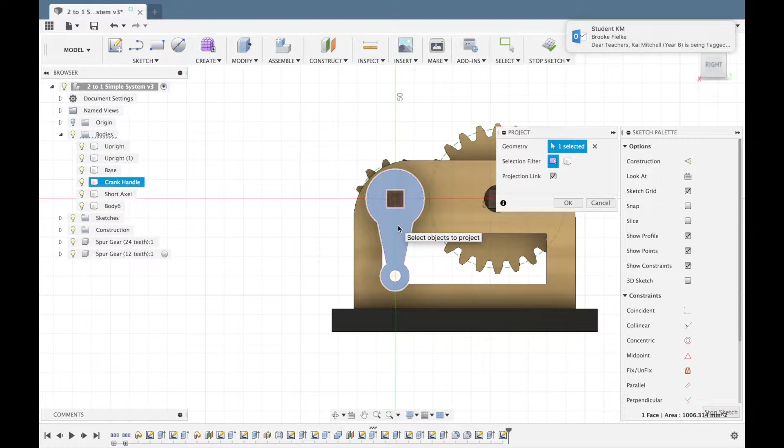It'll then take me in there. I'm going to press P for project. I'm going to click somewhere in the middle there so that all lines are basically lit up, and then I'm going to press OK. You'll now see that I've got purple outlines around all edges that I need to cut on the laser cutter. I'm going to now hit stop sketch.

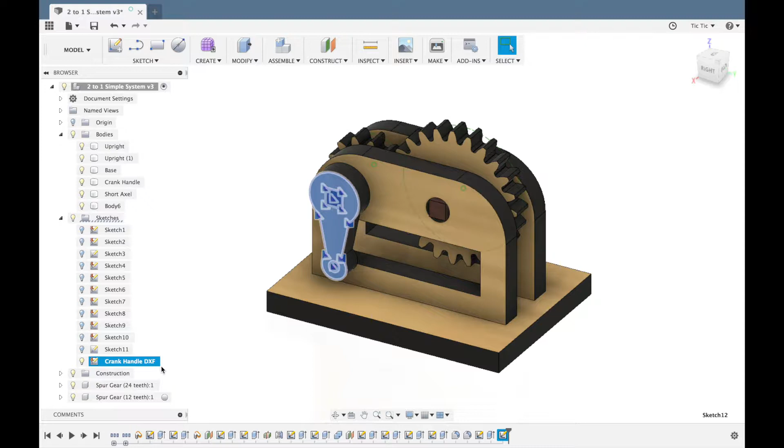That sketch is now visible, and I'm going to go into my sketches, and this one's the visible one here, and I'm going to call it crank handle DXF. I didn't accept that change. Crank handle DXF, enter. There we go, it's accepted that change. I'm now going to turn that sketch off, and I'm also going to turn the crank handle off.

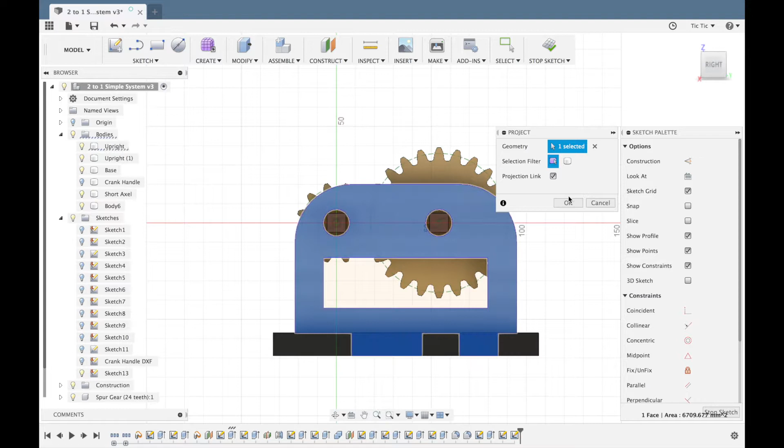I'm now going to repeat the process again, and I'll do it one more time for your benefit. I'm going to click on create sketch. This time I'm going to click on this particular one here. I'm going to press P for project, and I'm going to choose that particular one and press OK. I'm then going to hit stop sketch, and you'll see now I've got a new sketch down here, and this is going to be called upright. Press enter, and now it's called upright.

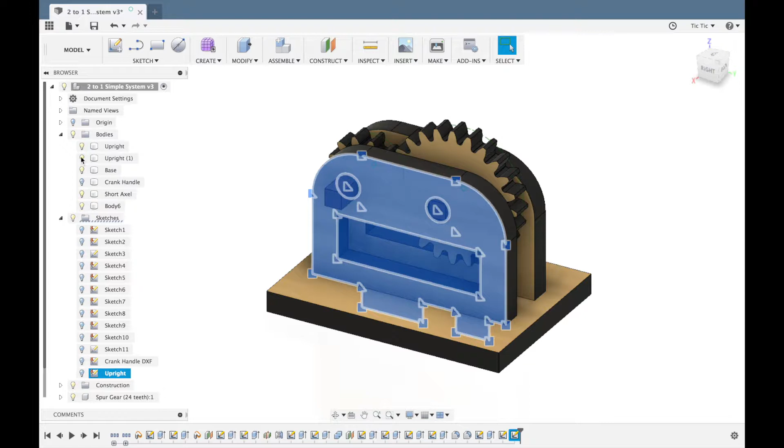Now I don't need to do the second upright because they're both exactly the same. So I can now turn off that upright and turn off this upright and this upright. And now I just need to work through the final things. I don't need to do the axles, so I should turn those off as well. So I do need to do 3 more things, and I'll do those now.

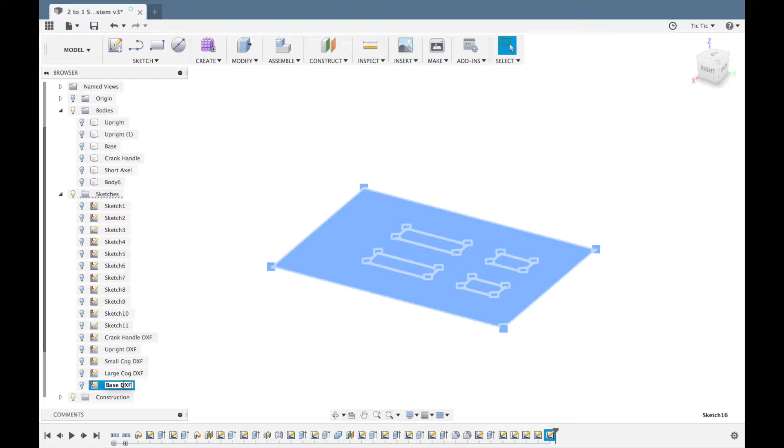I now have everything turned off, and I've got my final one here, which is going to be called base DXF, and I'm going to press enter, and there it goes. I can turn all these back on again, 1, 2, 3, 4, and 5, and these are all the parts that I need to create DXF files for. So now that I've created the sketches, I now need to create the DXF files.

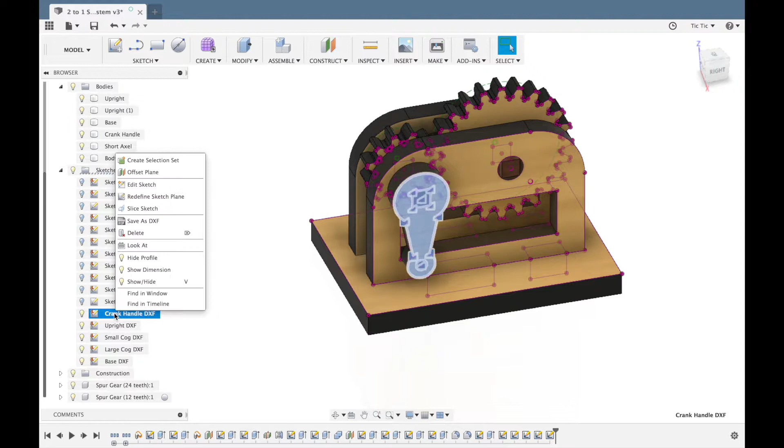It's now time to export my 5 DXF files, keeping in mind that I need to cut 2 uprights. So basically I just need to work my way through, and I like to have them all turned on, plus all the parts turned on, and then I work through like so. I go right click, save as DXF, and I've got a file on my desktop called Gear System, which I'm going to save it in. I wish it would transfer the name across, but it doesn't. So I'm just going to call this my crank handle, and I'm going to press save.

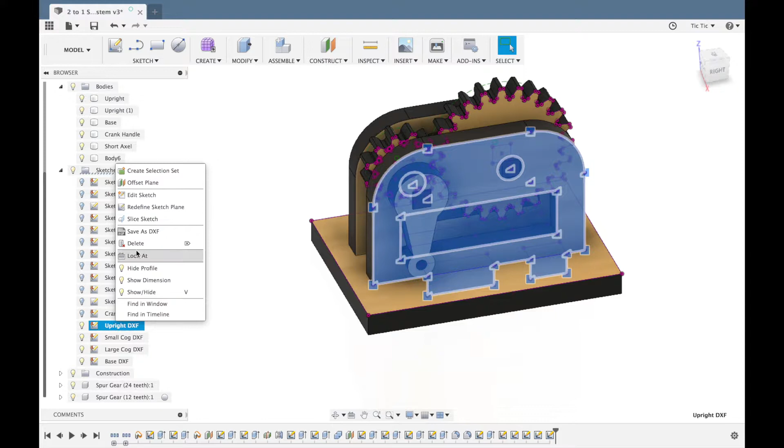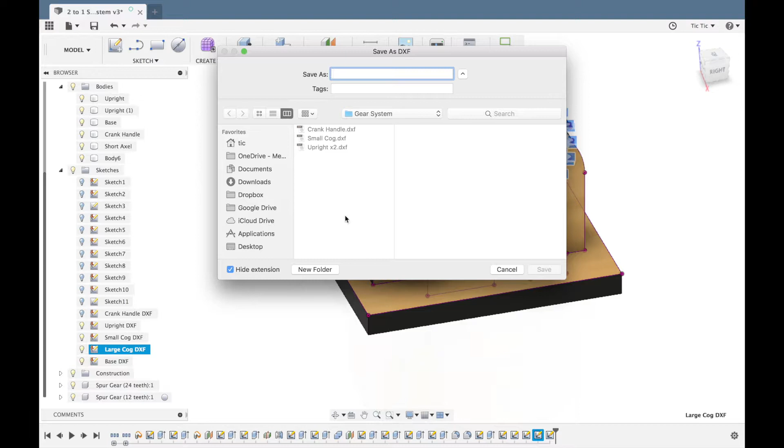I'm going to turn that one off now so I know I've done it. I'm going to right click on this one, go save as DXF. This one is going to be called upright, but because I need 2 of them, I'm going to write X2 so that I remember that I need 2. Hit save. Small cog, save as DXF. Small cog, save. Large cog, save as DXF. Large cog, save. And base finally, save as DXF, and call it base and hit save.

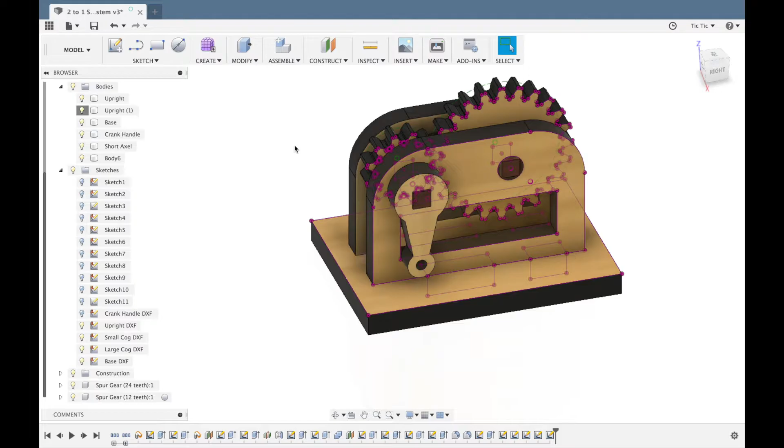It's now time to work in Adobe Illustrator in order to create our actual cut file. We're now working in Adobe Illustrator, and we're going to basically create our file size, or the size of our image, to match the size of our material. So we're going to go File, and we're going to create a new file, and we're going to use a custom size. Our material width is 800.

Our material height, the actual width of each board, is 140. So we're going to take 5 mils off just to ensure that we don't have any issues, and that will be basically 135 millimeters, and we're going to call this one our gear system.

I'm going to click on OK now, and I'm going to hit skip on these. I get these errors; you probably won't get these errors. All of our pieces need to fit on this strange size piece of screen, which is actually the same size as our material in real life.

So I'm going to go File, Place, and I'm going to place from the desktop. There it is. From Gear System, all of these files, I'm going to select them all. Remembering that I've got upright x2, and hit Place. And I'm just going to put them anywhere for the time being along here. So the objective here is to make it so that they take up the least amount of space as possible, so that we're not wasting our timber.

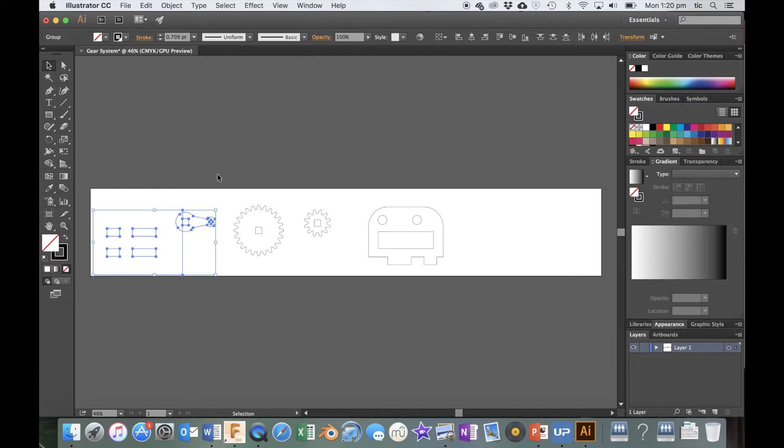Making sure the black selection tool is selected, I'm going to select this one, and then I'm going to move my mouse to the top corner, press and hold Shift, and drag it round until it's sideways, and making sure that I've still got that selected, just drag it over here so that it fits on there like so. I might bring this around here as well, like so, and oops, click on it again and move it up there, and yes, it fits.

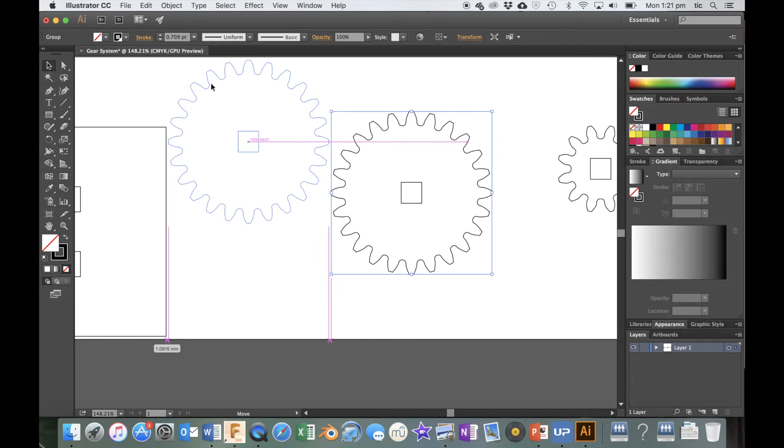I can zoom in on this, and it definitely fits on there. You need a little bit of space between things, but not a huge amount. So I'm going to move that to there just to make it as efficient as possible. Got my gear here. I'm going to move that in close to there without touching it. And this gear here is good. And then I've got this upright here. I need 2 of them. Might go this way and see if it fits, which it does. And this is going to take up the least amount of space possible.

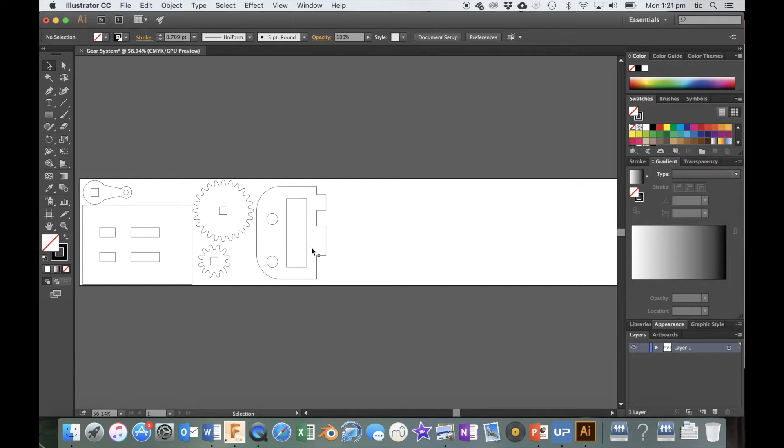And then I'm going to select this, Edit, Copy, Edit, Paste. There's another one. Just move it along. You can use the arrow keys if you want to move it, and if you press and hold Shift, it moves a bit faster. I'm going to select the whole lot now just by drawing a box around with the selection tool. I'm going to change the stroke size to 1 point, and that should do a good job.

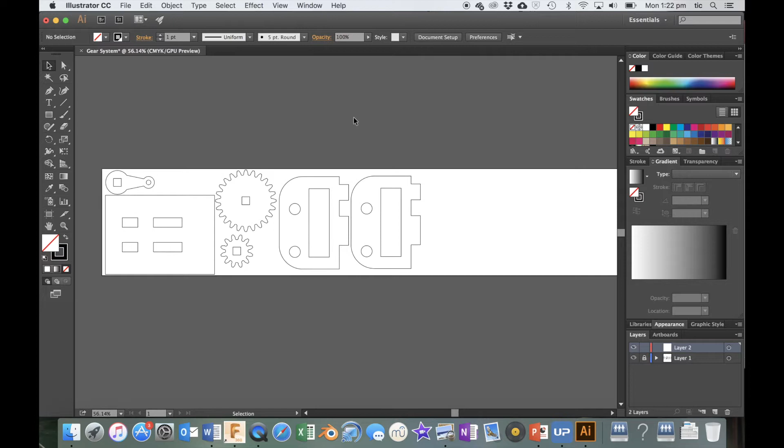I'm now going to lock this layer down in the layers panel down here. Click on that, lock the layer. If you can't see layers, click on Essentials, and that'll give you the layers down there somewhere. Okay, I'm going to create a new layer now. That's the new layer button. This is the red layer, and this is where I'm going to put any decorative features. For example, if I wanted to put in some text in here saying 2 to 1 gear system, I press Escape at this point, and I can now zoom this up, make it bigger like so.

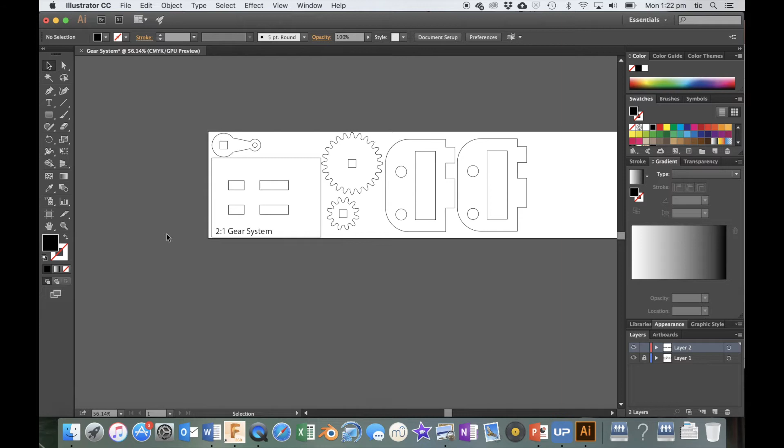And one thing I'm going to make sure that you do is every single part you create, you put your initials on somewhere. It can be as small as you want. So for example, I'm going to use the text tool here, and I'm just going to say TIC, those are my initials. I'm going to make them really small. Let's just try 7 points. That's really small, there you go. And that's just going to be somewhere here.

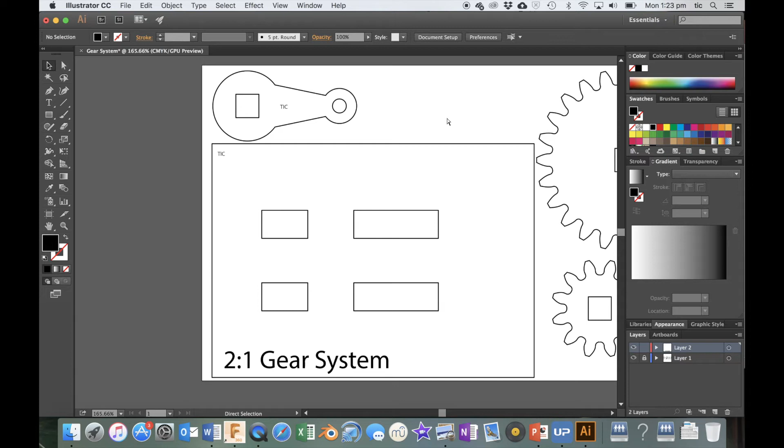Command C, Command V, there it is down there, just move it onto that one somewhere. Command C, Command V, just drag it onto one of those. Control C, Control V, that'll be fine. You probably want yours in a more discrete location because these are actually going to be burnt into your particular thing. So Control C, Control V, one on there, and Control C, Control V.

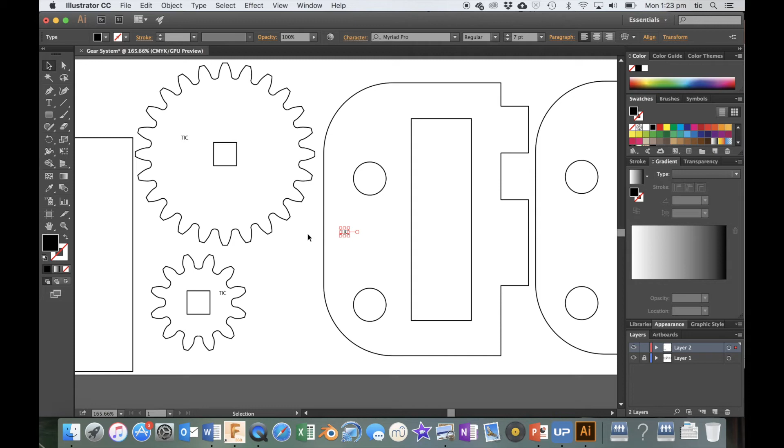I want one over here. Oops. Having trouble grabbing that now. I'm going to zoom up. There you go. Over there. Oops, even further. Zoom in. And that one can be there. So I've got all of those there. Those are all my names.

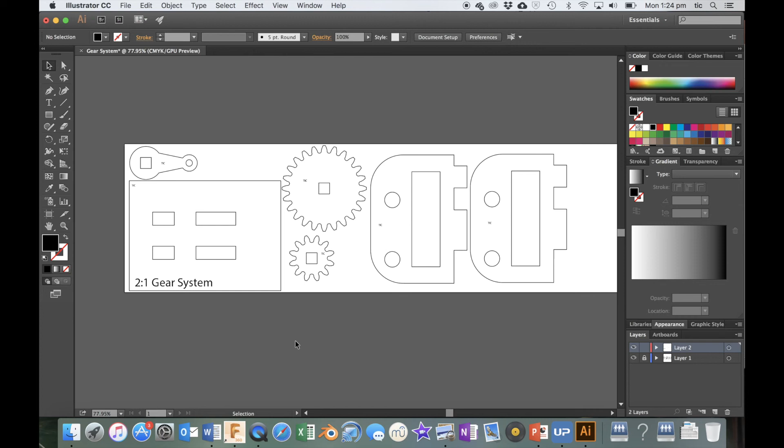So now that I've got those in there, I need to select them all. Because I've got this layer locked, I don't select it, so I select all of them. And then I can go on to Type, and I need to choose Create Outlines. That's really important to create the outlines.

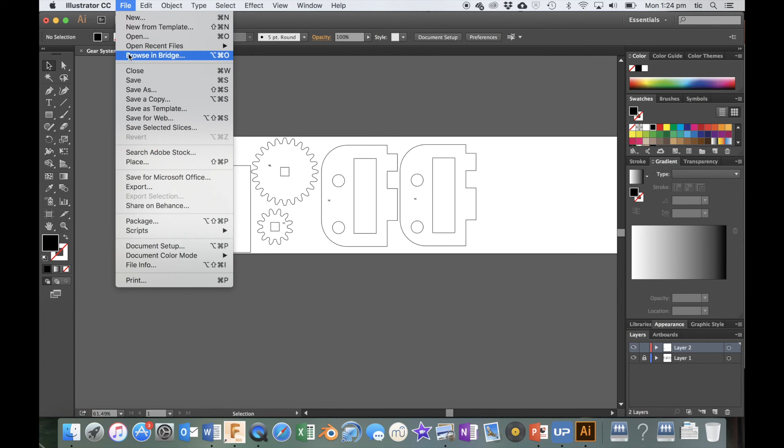Now that I've got those layers done, I can now go File, Save, or Save As. I'm going to save it in my Gear Systems folder on the desktop, and I'm just going to save it straight like that. Press OK. And that is the file I need to Dropbox so that our technician can print it.